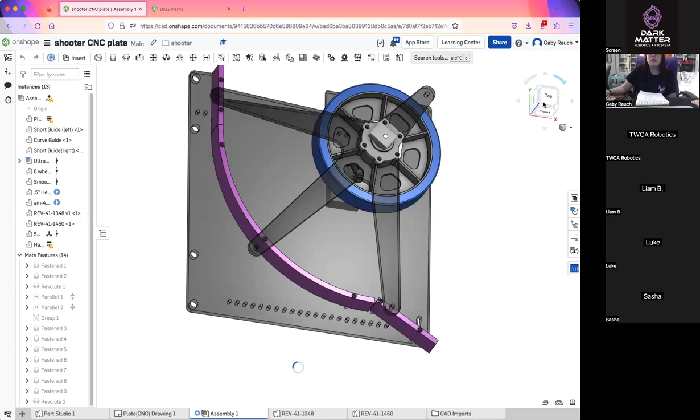Actually, first, last time I said I would show a good example of a sketch. So this is our shooter plate for our ultimate goal robot, and it loads. It looks pretty simple at first, but there were more calculations than you would think to go into there, and you can actually see that in the sketch.

So I was telling you about how you can use construction lines in your sketches, and that's basically what this is. So this is just our plate, and this line here is the shooter wheel, and this line here is that guide. We have exactly, I think, 4 inches in between here so we know how much the ring would be compressed. We used that exact same line as a guide to create our guide, so we knew what we were doing. That's just an example of how you'd use construction lines to help visualize what you're about to make.

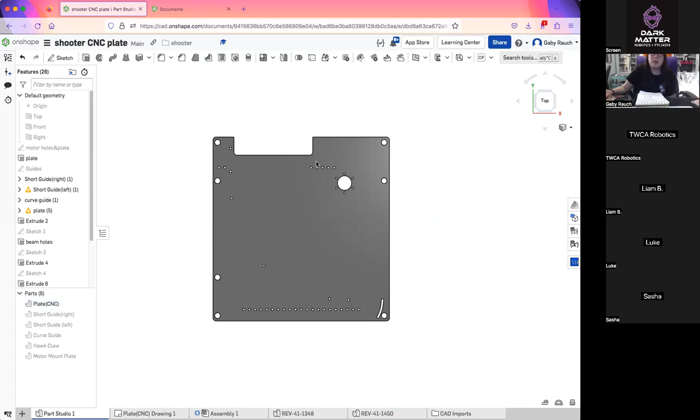I also said there were drawings last time, and this is kind of an example of what that would look like. I don't know too much about drawings, so we're not going to really cover them, but this is what that would be. You can use them a lot to help when you're actually machining parts. When we have someone else machine parts for us, we can create a drawing, and it helps them get an idea of what they're making. So I just wanted to go over that real quick.

So going over the feature scripts, let's go into day 2, and we could do this. If you want to go into day 2, there's a small enough group that hopefully we can all work in the same document this time.

So once again, let's create our own tabs, and that's going to be Part Studio, then create Part Studio, and then rename it.

And if anybody has any problems with that, let me know. But hopefully we should be fine. There's no plus sign again. If they're still having problems with this, I honestly have no idea why. Just create another document again, like we did last time, and see if that will work.

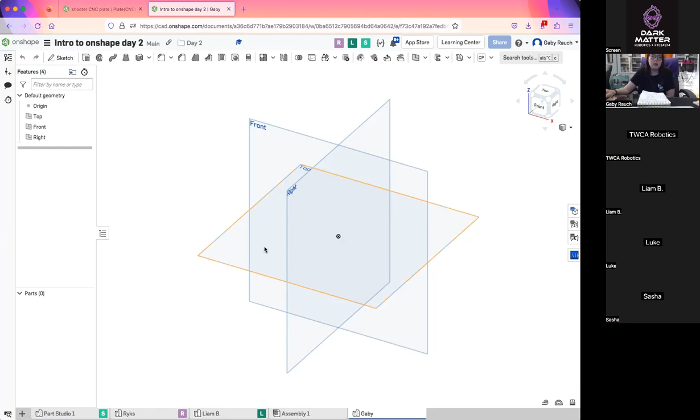And then I'm assuming everybody got the email about the feature scripts, so I am going to just go over how to use each of those really quickly.

So the first one was chain path generator, but that one I tried to use the other day, and it's kind of an older one, and it actually did not end up working for some reason. So I don't know why chain path generator doesn't work anymore. But there were some other ones we could do. So what were the ones that I had?

So spur gear, I know, was one. Spur gear is pretty easy. You would just click on spur gear and it will import one. And then all you have to do is go into here, so we could choose whatever number of teeth we want on the gear. So I can have that be 35. I can have it be... not 3... have it be 15. You can change that number to however you want.

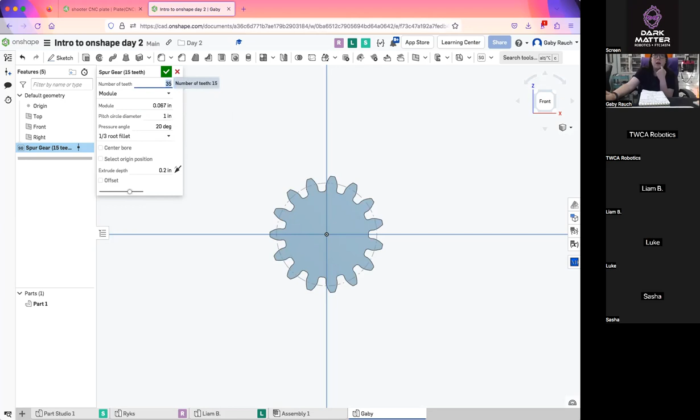And then this number is going to change based on how many teeth you have. I believe that is your pitch, so the number between your teeth. And then your circle diameter — the actual diameter is going to be this circle, which is called your pitch diameter, which is pretty much the center of your teeth where your gears are going to mesh.

So that's kind of like your desired size of your gear. So if you wanted your gear to be able to mesh with an already made gear, you would have to get the actual dimensions of that gear and use the same pitch diameter. And if you use the same pitch diameter, you'd have the same amount of teeth, and you'd have the gear that would work with whatever one you bought off the shelf. All of that information is going to be in the documentation of the part that you bought.

And then that is pretty thin. The root fillet is going to be the angle of this, I believe. Or that's the angle, this one.

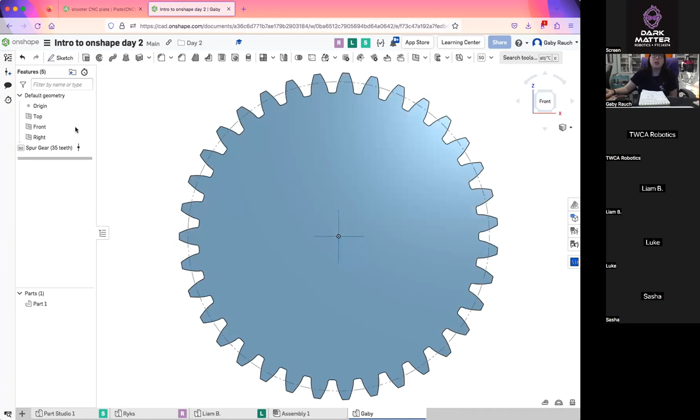But this one is pretty easy, especially for prototypes, making smaller gears. You just press this enter button up here to confirm your gear. And this one is a giant one.

I believe the other ones need a quick circle. You need a circle or a cylinder for the next couple, so I'm just going to make a cylinder really quick.

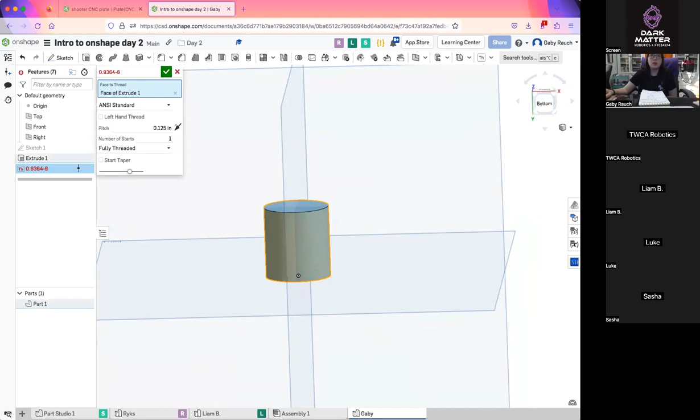The next one was thread creator. You need some sort of cylinder for this one, and then you're going to select the cylinder and it will automatically put some threads in for you. You can adjust the pitch of the threads.

Just like that, and that's pretty much all we use on that one. I believe you're usually going to be using standard. That's another thing you have to check with whatever screw or nut you're trying to match.

And then this one is kind of like if you wanted a shoulder bolt, you'd be able to adjust how far it is threaded down. So that probably wouldn't be used in a practical sense, but it would be used more for your CAD if you can't find the CAD of what screw size you want.

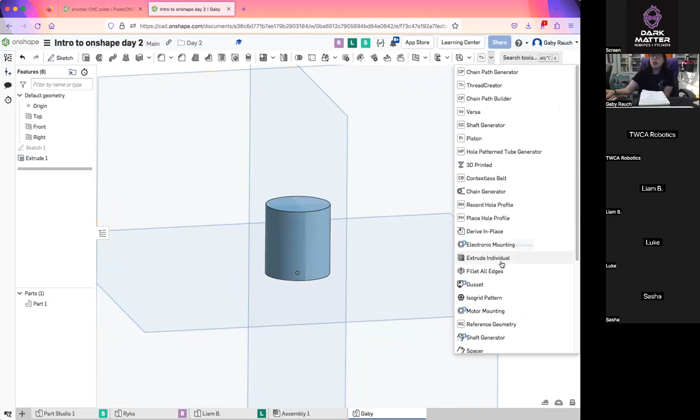And then spacer, you have to have a circle. Whether that's an extruded part or just a sketch of a circle, it will take that diameter and create a spacer for you.

So it will have a hole in the middle, and you can't adjust the hole, you adjust the thickness of this right here. So I could change that, and it will adjust the thickness. Oh, that is the hole. Yes, that is the hole. So you can adjust the thickness of the hole inside of there, and it will automatically give you a spacer.

And then this one is your length of the spacer. What were the other ones I had? No, I have it written down.

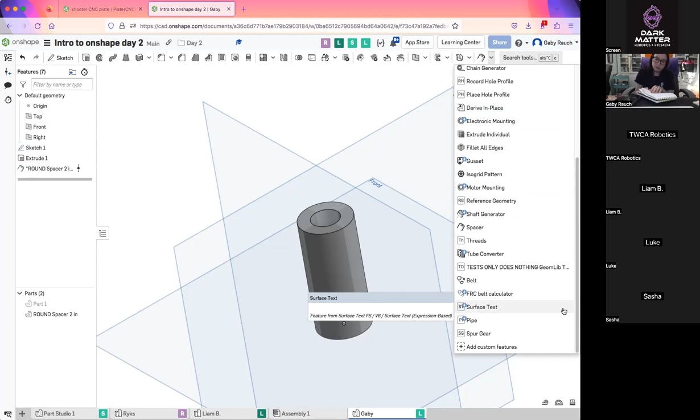Okay, so then the other one was chain path generator, but chain path generator is not working, like I said. What you can do is use chain path builder. And no, not chain path, I have too many of these. Chain generator, and you would put in

your center to center distance. Now your center to center distance is not going to be 12, you'd have to use what's called the chain calculator. The one we use is called the Recalc, it's R-E-C-A-L-C.

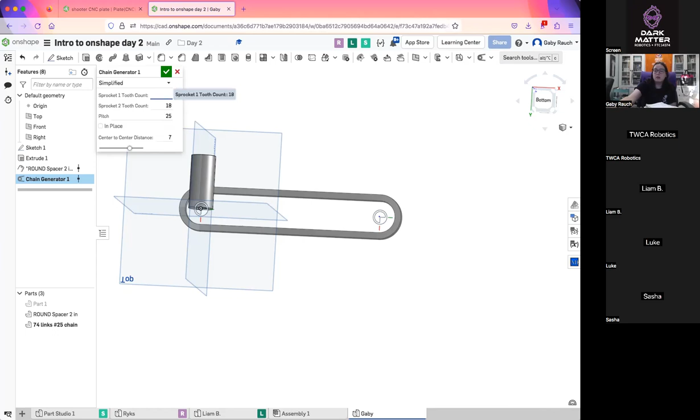You basically just put in the size of your sprocket and the size chain you want, and it will calculate it for you. So you just put in that center distance here, and then the size sprocket you're using, so the number of teeth on that sprocket, and it will automatically adjust the size for that.

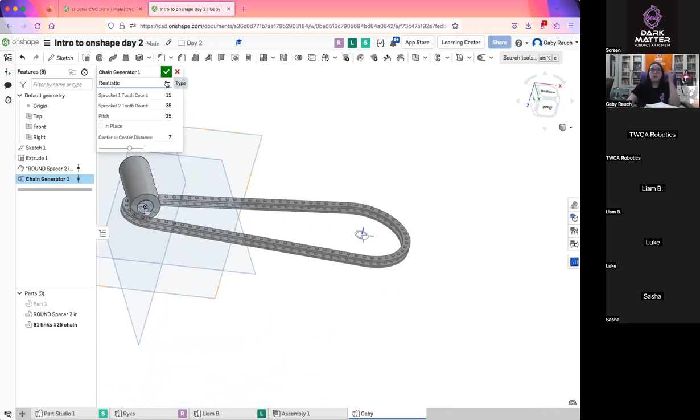This is pretty much just cosmetic for you to use in your assemblies, just to show that there would be chain whenever you are using chain.

And then this one, I don't know if most people are going to be using this one, but it is pretty much just a really easy way to do pocketing. So you might see some people that CNC their own parts and have cool patterns inside of it. You can use something like this for that.

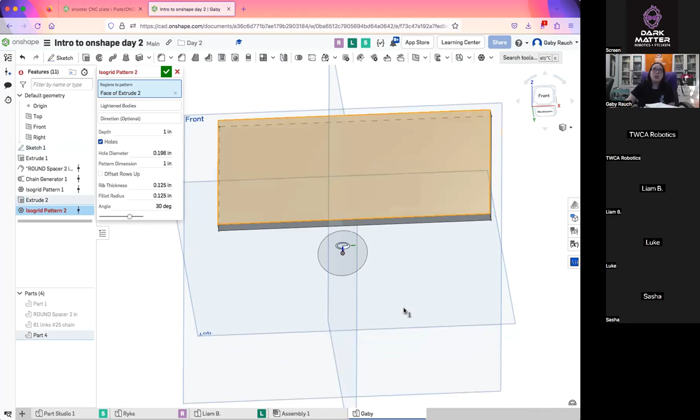And you can see that it just creates its own type of pattern. You could change the depth on it if you don't want it to go all the way through. And the holes, you could take them out completely or add them in, and you can make the pattern bigger or smaller depending on how big of a plate you have.

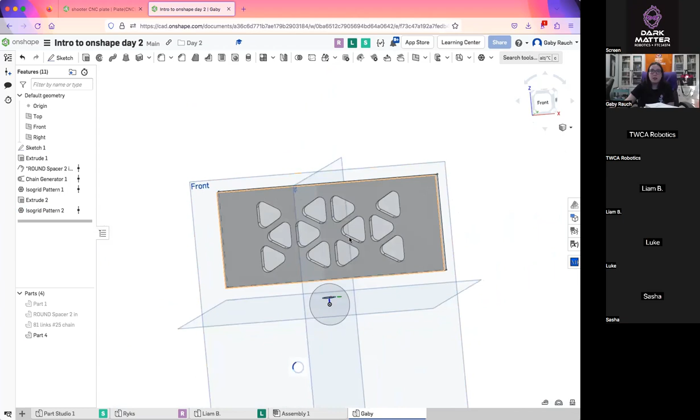So that's the main feature scripts that we use, it just makes life a whole lot easier. Instead of having to draw a bunch of triangles, it just generates it. Or instead of having to make a bunch of spacers, you could use the same circle to make other spacers. So it just makes life a whole lot simpler. That is pretty much all I had for feature scripts right there.

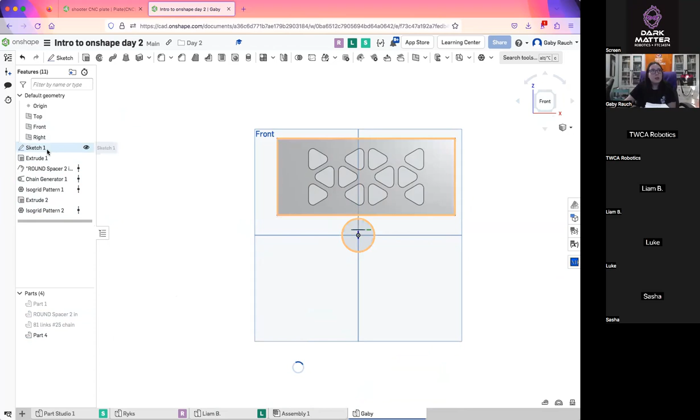And now we can move on to our assemblies. But before we do that, we do need some parts, since everybody is working in different documents. And my Onshape is going to not like me and load forever.

So we are going to make this real quick just so we can show better what we are about to do. If you want to follow along so we can all have the same parts once we get into the assembly, it is a pretty simple sketch.

We are just going to have a rectangle, a center rectangle from the center and go out, and each side is going to be 2.5 inches. Then just make all of the sides equal, so equal and then both sides, and you'll have a square.

Then we're going to take a line and make that a construction line, have that be a 1-inch line. Then put the midpoint - grab midpoint, select the line, and put the midpoint at the origin.

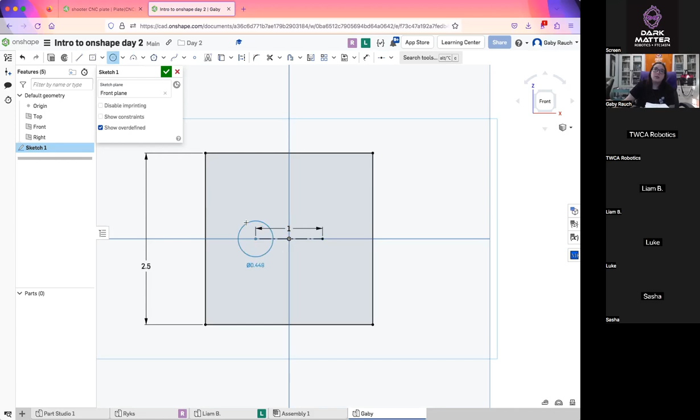Then we are going to take some circles and make them 1/2 inch. We can set those equal as well. Then the last thing is just drawing a line straight down the center. So everybody can have that done real quick.

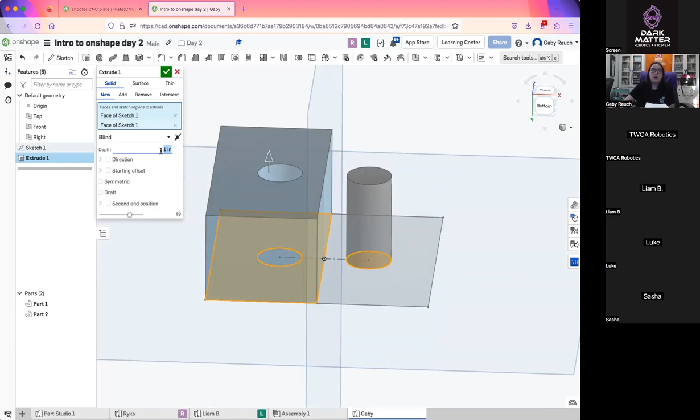Then we are going to extrude, so that is Shift E, with this button up here to extrude. This rectangle and this circle are going to be an inch and a half.

It's going to automatically hide your sketch, so we need to come and press the eyeball so it shows up again. Then have these two and extrude that 1 inch, and make sure those are both in new parts and not add, so they are their own thing.

Actually, you don't need this circle - I take it back, just this rectangle part. New part, 1 inch.

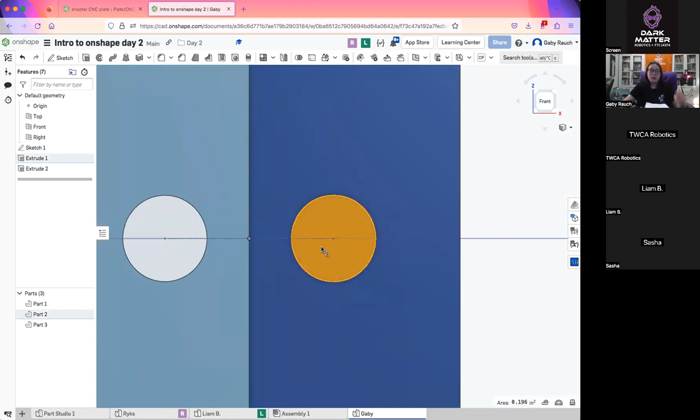Then really quickly so that we can see something later, we're going to create a sketch on top of this circle here. Click that circle and then press sketch. Then we're just going to draw a rectangle right there. You can dimension it if you want or not, it doesn't really matter. Then we're going to extrude that.

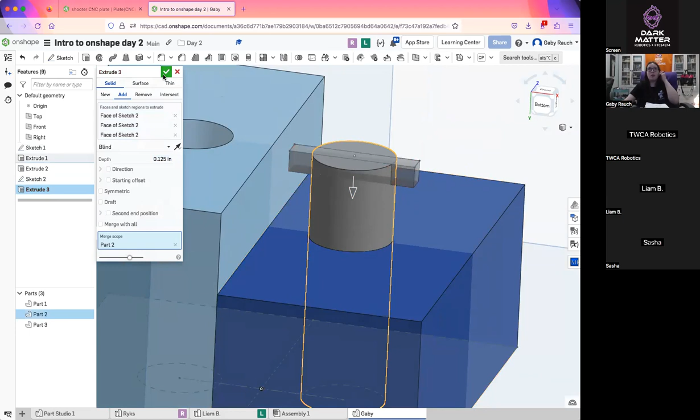Except we're going to extrude it down 1/8 of an inch, and that is going to add to this circle. If this part is red for you, or if it looks blue, you just have to hit that merge scope button and make it merge with that part. And that is it. Does everybody have that?

Is that sketch for you?

Remember, if you need to get this dimension tool, that is right up here. You can just click that, then click the line, and then type a 1. That will give you that distance.

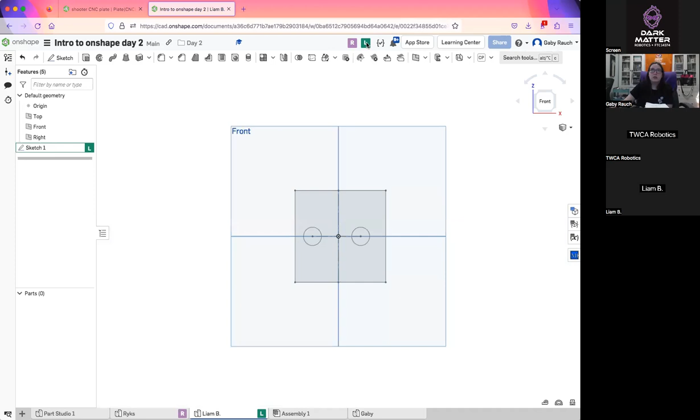Then to get that line in the center, we did - line L, dimension, 1 inch, and then we went to the constraints and got the midpoint constraint and clicked the line at the origin.

Right now, I'm not too worried about getting it perfect. We really just need the parts so we can put them together, pretty much.

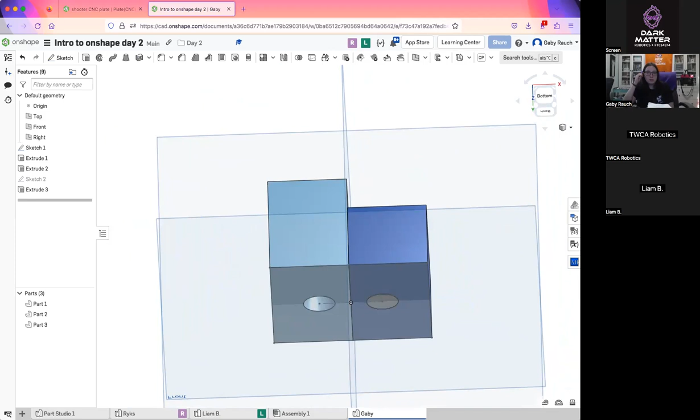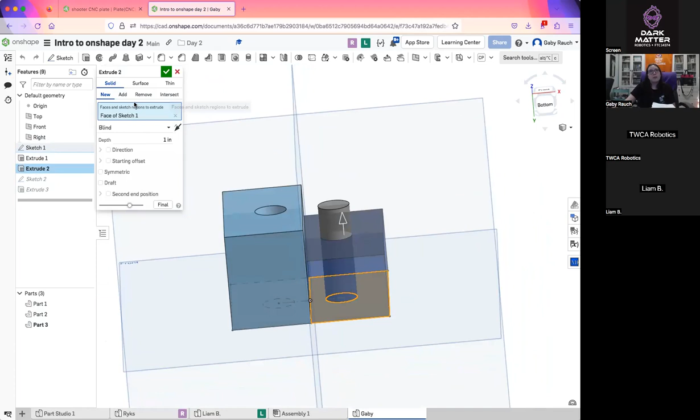And then that circle and this half was 1.5, and then this one is 1. So remember, you have to select them separately when you go to extrude. Then do another extrude and select this one, that way they're at different heights.

So Liam, I think your problem is your line right here needs to be a construction line. You should be able to go in your sketch and click on that solid line and click construction, and it should go away, and that should solve your problem.

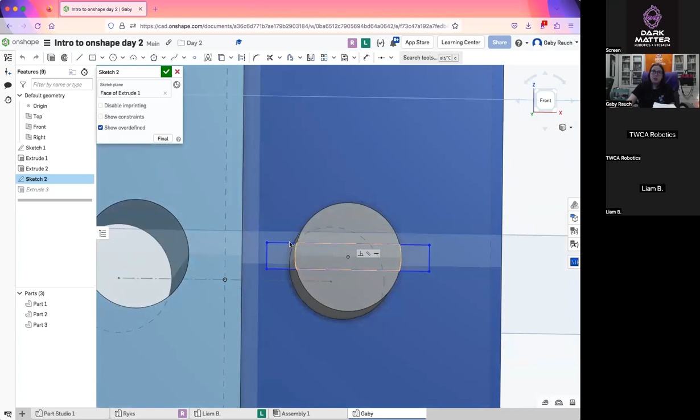Perfect. Now the last thing is the little doodad on top here, and that's undimensioned - it's just a rectangle on there. Then extrude it downwards. If you need to change it if it goes up automatically, you just need to press this little arrow to make it go down.

So all you have to do for that is do a sketch and then select that top part as your plane. Then you can sketch on top of that.

So you can select multiple things in one extrude. You can see I'm able to select this side and this side in the same one. Perfect.

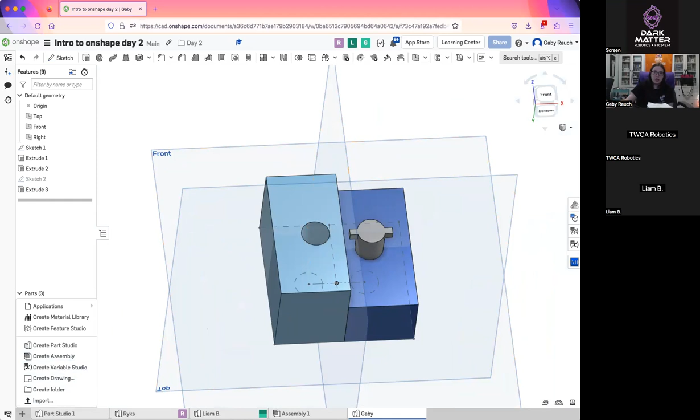All right, so now that we have that, we are going to talk about assemblies. An assembly is a different tab, so you have to insert another tab, but this time press create an assembly. Then you can go ahead and rename that assembly.

You'll always be able to tell that the little square doodad is the assembly and these little rectangles are the part studios. So in your assembly, what an assembly is basically is when you take your parts and put them together, or take other parts and put them together. You do that using things called mate connectors that we will get into in a minute.

But to put things together, we have to actually get the parts. To do that, from your assembly, you press insert up here, and then you have 3 options. Your current document, you're going to have access to every part studio and every assembly in here. Once you have an assembly, you'll be able to see that, but we have access to all the part studios. So if you click on one of the part studios, it will import all the parts at once. If you click this little drop down, you're able to import one at a time.

You have to actually click to put it down. If you press the X, everything is going to go away, so you have to actually click the check mark for it to stick.

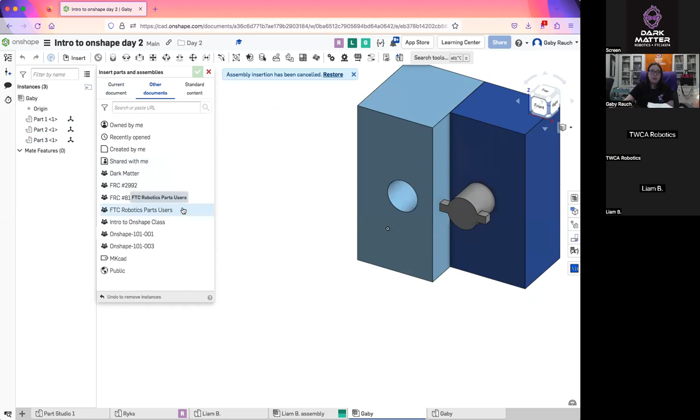Do you have the FTC part library? You should be able to go to other documents and see the FTC Robotics Parts Users. Do y'all have that? Once again, from here, that is other documents, and then you should have this. Put in the chat if you do have it or if you don't.

They may have not given access yet, which is really annoying that they don't do that. There's nothing in shared, well it should not be in shared with me, it should be a team. So there should be other documents, and it should be right down here, with the little people on the left. You should have the intro to Onshape class, and then there should be this one.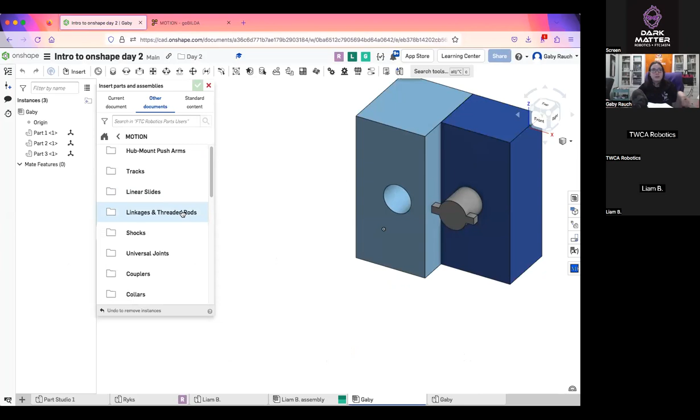So if you see, when we click on goBILDA, they have motion, structure, electronics, all of that, all the same. So if I click on motion, I have all of these exact same options. So if you ever get stuck looking for a part, you can actually find it on the website, and that will show you how to do it on here.

So if I wanted to find a sprocket, let's say I wanted this hub mount sprocket. Yeah, that's a bad one. Hubs are a good one. Let's say I wanted a hub. So this will actually tell you, you can actually see up here, it says motion, hubs, sort by style, and let's say I want this one, I'll press imperial.

And you see that it is the exact same way: goBILDA, motion, hubs, and then they have the sonic hubs and all the different ones on here.

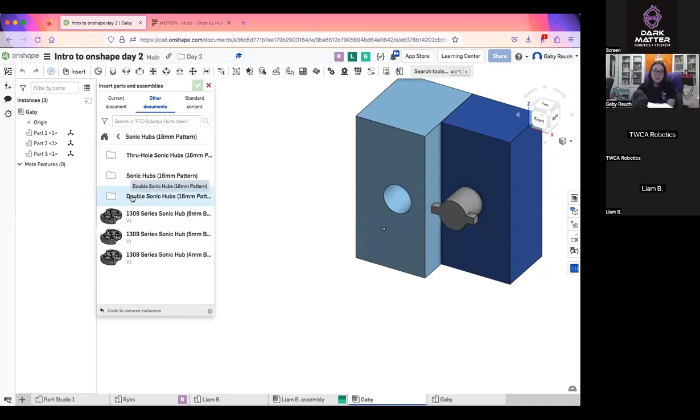It doesn't matter if it has the right dimensions or not. We basically just need the shapes to be able to show the shape. So you would go through here and then you'd be able to click on the parts. You want the assembly if it's an assembly. If not, you'll be able to just click on the parts and bring it in just like that.

You can also do that with any other documents that you have. So let's say you're making a robot document and you're trying to make a full robot assembly, and you build your drivetrain in one document and your lift in a different document and a claw in a different document. You'd be able to actually go into those documents the same way and grab those assemblies and parts just like that.

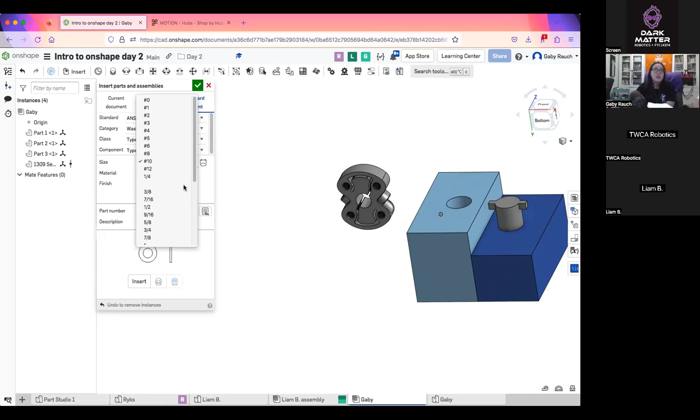And you can also search public on here as well, and then they also have some standard content over here. So that is things like screws and washers and nuts and just random things like that. So they have washers, they have different types of washers, and then they have different size washers. All you're going to do is press insert once you get all the right stuff that you want. You can change it to screws and get some standard normal screws, and you could change whatever head you want and whatever size you want, and it will give you a screw of that size.

It's not threaded just because it makes it easier for Onshape to render. But that is some standard content that you can get, that Onshape just has for you to make yourself pretty easily there. And then you can also get stuff off of, so let's say that you don't have the parts library yet, but you still can get the parts from the actual website.

So for example, goBILDA and Actobotics, and pretty much all the vendors we use are the same. If you click on their part and scroll down, you will see a STEP file. If you click on it, you will download it, and you can go over here and import it, and it will be able to import the part. It will show up in its own tab and do its own thing, and you will be able to insert that into your current document. So that is how you can get the same parts without being on the parts library.

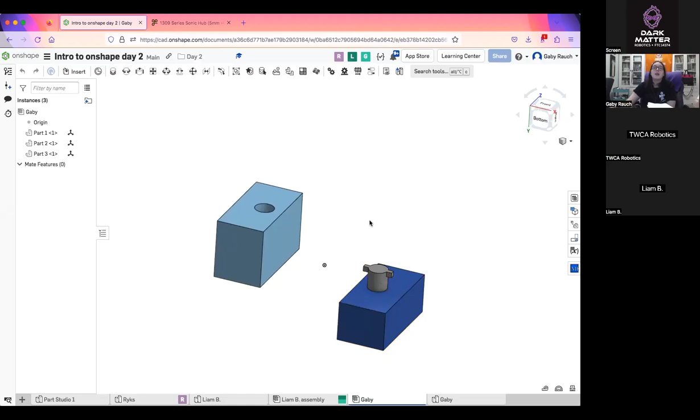But for now, we're just going to use these parts that we made because they were made for this. So you can see right now everything comes apart because nothing is mated together. So what we use in assemblies to put things together is called mates and mate connectors.

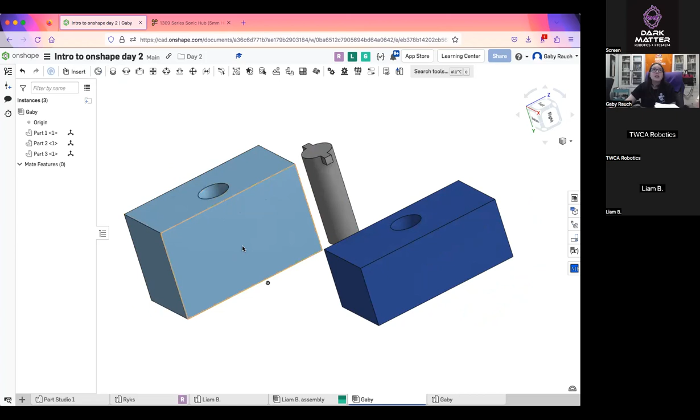Basically your mates and mate connectors are the virtual screws or glue that hold your parts together. So a mate connector is what is actually on here, that is like the point that you are going to put to another point. That's called a mate connector. This little circle on these white dots, that is what's called a mate connector. A mate is the actual one that you're going to put. So you use a mate, you grab a mate connector and click another mate connector, and it will glue them together. So there are different types of mates, but there's only one mate connector.

So the first one is a fastened mate, and that is pretty much just like glue. You can click this one up here, this is fastened, and you will select one of these. You select a mate connector from one part, and select a different mate connector from another part, and it will just put those two together.

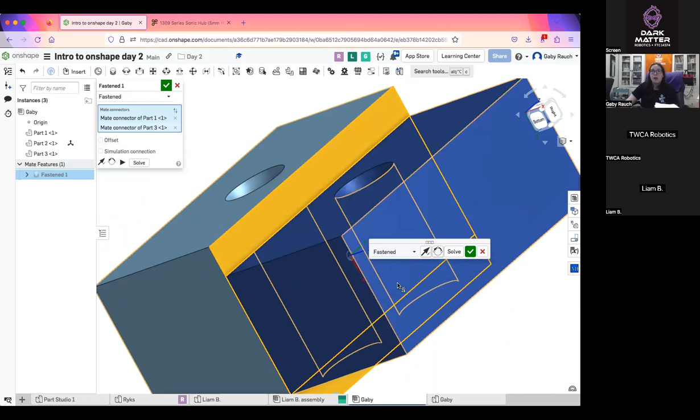And if you press, there's this little menu that pops up. If you press this button right here, it will rotate the part. If you press this one, it's going to flip the axis of it, which looks really weird. And then if you press this check mark, it will just bring you to having another mate connector. It will keep the same mate connector menu open, and you can rock and roll all through like this. But if you click the mate connector check mark up here, it's going to take you out of that menu.

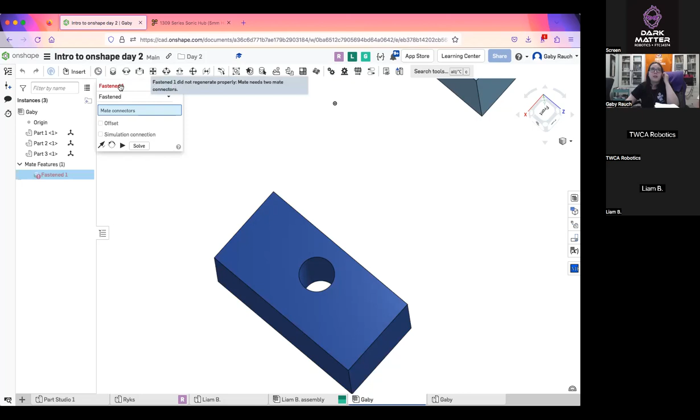So sometimes it can be hard to select your mate connector. Let's say I'm doing a fastened mate and I want that center one down there, it's kind of hard to select. So if you actually select in here where all three of these little white circles pop up, you can hold the shift button down, and no matter where you move your mouse, those three are going to pop up, which is very helpful too.

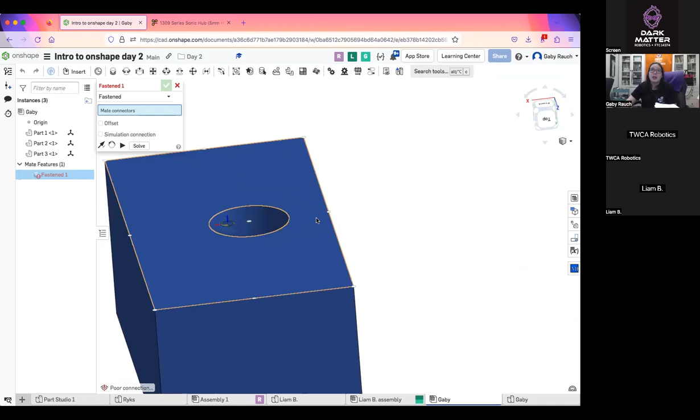So most of the time when we're mating things together, we're going to mate the faces, so like this face to one of these faces. It doesn't really work when you do a corner or a line or something like that, more often than not. It's easier just to mate a face to a face. And you can do all these other ones instead of just the center one. You can select the side one and go to the side one, and it will do the same thing, but now it's not centered. So that is your fastened mate.

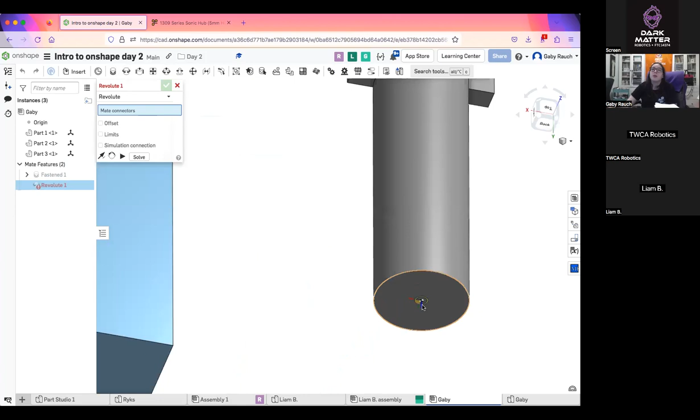The next one is a revolute mate, which you can probably tell what it does already. The revolute mate is for, you're mostly going to use it on circles and cylinders. So if we take the bottom of this cylinder or the middle, the bottom is usually easiest because then you could just select this ring down here and it will select like that. Oh wait, no, that's the wrong one, this one. And if you ever select the wrong thing, instead of deleting the part over here, you can actually delete it using these arrows, so you can see which one you selected and do it that way. So with this one, it allows you to actually rotate.

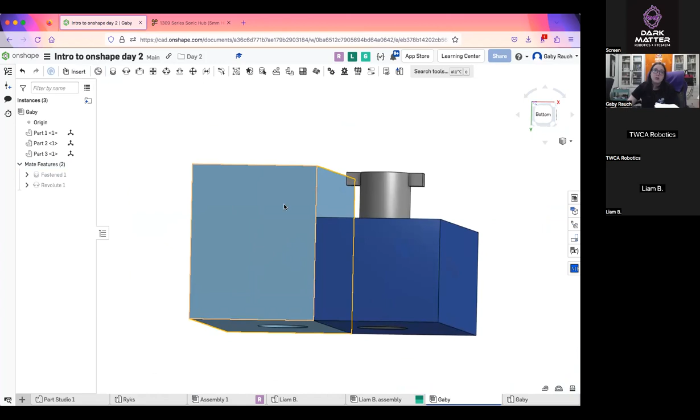One thing to mention about making assemblies: you always want one part to be fixed in place so it can't move. Right now everything can move, even though they're stuck together, the whole thing can move. If you right click on one of the parts, you get all of these options, and the most important one is fix. You want one part in every assembly you make to be fixed, that way the whole thing doesn't move. Then you try to move other things.

Now that is fixed, I'm actually able to rotate this part right here, since I have a revolute mate on it. So let's say you were making something like a turret, an intake, or something that you need to spin in CAD to see what it's going to do, you would use that revolute mate.

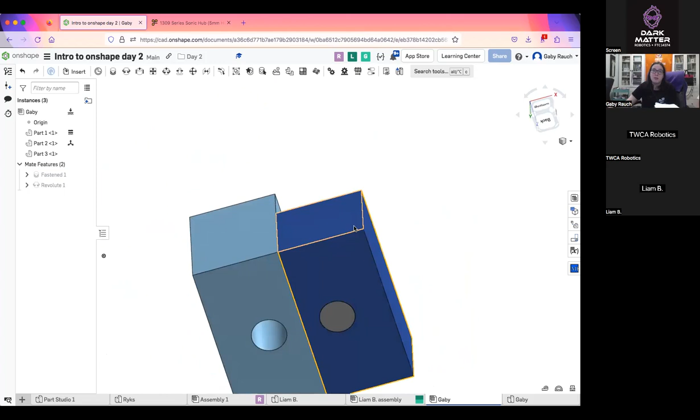One thing to note about revolute mates is they are notorious for making Onshape run very slow. The more revolute mates you have, the slower it is going to run. So you want as little revolute mates as possible when you are CADing, especially in Onshape, because it just makes it so annoying when you have a million of them. So that is the revolute mate.

To delete parts or fastens, you just click on it and press delete, or you right click and press delete. Sometimes it only likes to right click one. So you see I fixed it so this one can't move.

So the next one is a slider mate. Just like you would think, that one slides and doesn't allow you to do anything else. I believe this one only lets you slide vertically up and down. This is what you would use in the case of a linear slide or something like that.

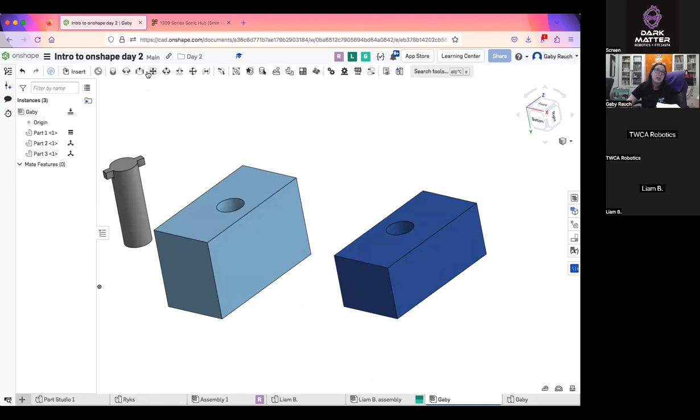Usually when you're doing linear slides, I'm going to make it like this because that's how you would do it. You would go to the bottom of the part and select the edge of both of those, and that's how you would do a linear slide. Now you can see that it could go straight up and down, like that. So once again, that's how you would do something like a linear slide, with a slider mate.

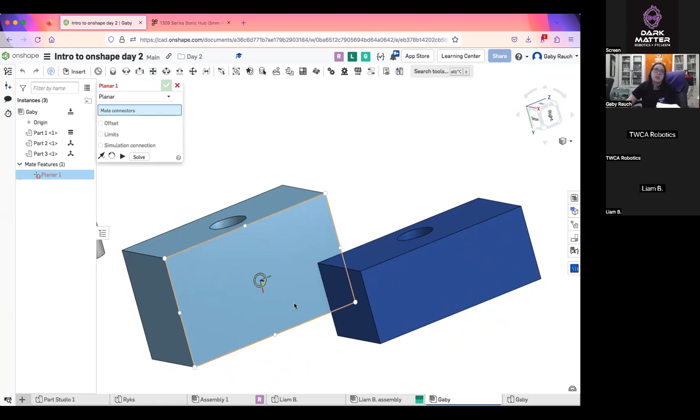Delete that one, and the next one is a planar mate. You're going to select a mate connector that is on the plane you want it to be on, and then select the face you want to be on that plane. Then you'll be able to move this all around, but that face will stay on that plane, or it should, but it's not working very well. Sometimes I just don't understand this one.

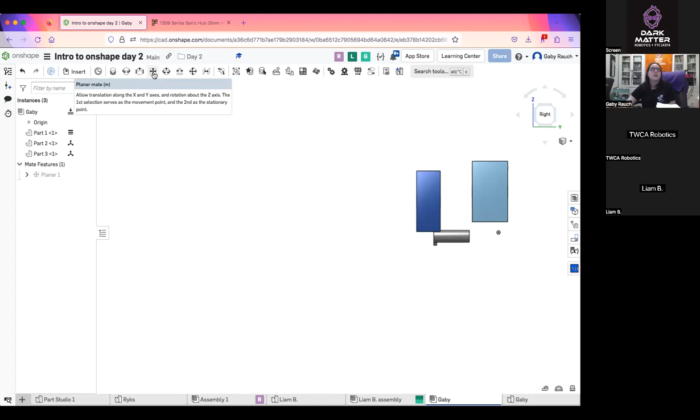Maybe it's because this one is fixed. Now that that one's fixed, you can see it moves just in a pretty weird way. You can see it is staying on that plane right there.

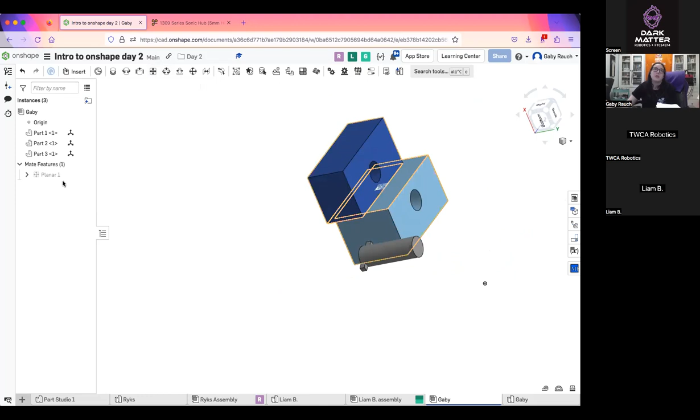So when we did that one, you see the first point that we select - I'm going to select this one now - that's going to be the side that can move around freely, and the second point is going to be the stationary one. So now if I were to fix this one, clicking the dark blue one first, it's still going to be weird. And it's broken. Oh no, it's still on the plane. It's still on the plane. It was broken.

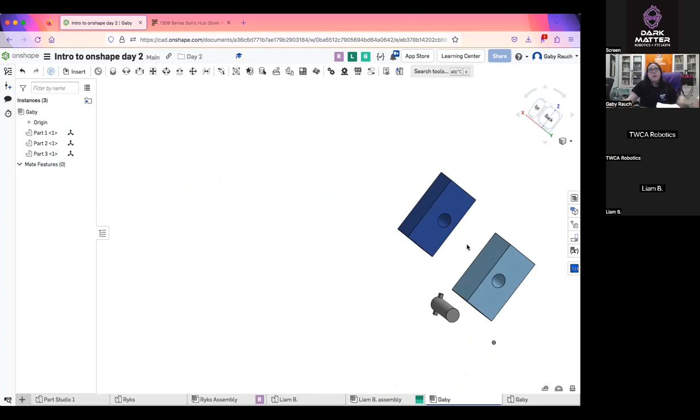So then cylindrical mate is an interesting one. I'm going to fix this one again so it doesn't move. A cylindrical mate is basically a slider mate and a revolute mate in one. So I can select that now, and it will actually be able to slide in and out and rotate as well. Sometimes that would be used for something like a pin.

Then the last one I have here is a parallel mate. This would be something you would use if you are making linear slides and you have two of them and you want them to be the same, going up and down together. You would use a parallel mate, so you would do this one, the top and the top of that.

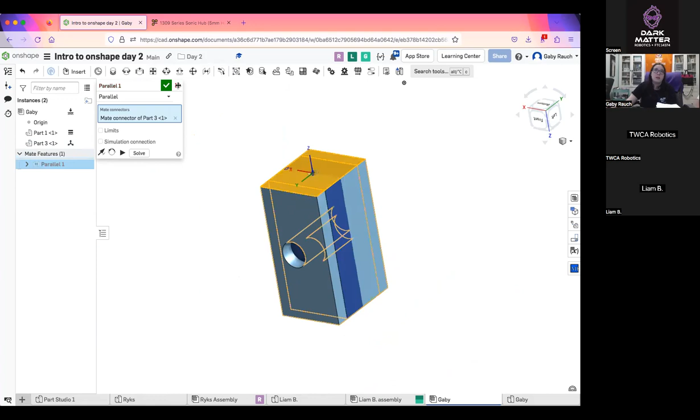Basically I can move them - well, not that one, it's going to be broken. But these are going to move together, or they should. But they're not, why? The parallel one is just like planar, it gives me trouble sometimes. So they're basically just going to stay parallel with each other, if you have something like a pivot.

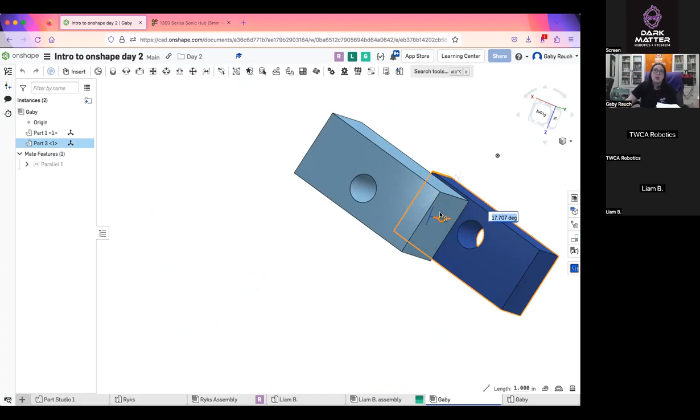You can see that they're going to move together and stay parallel when I move them. The planar mate is the one that's going to keep it like a linear slide. That's what the planar mate is. This one is for like a pivot, if you were doing a pivot.

Okay, so that is all the mate connectors that we use. Mostly there's the pin slot one, the ball mate, and tangent, but we've really never used those very much. The ones that I showed you are most commonly used.

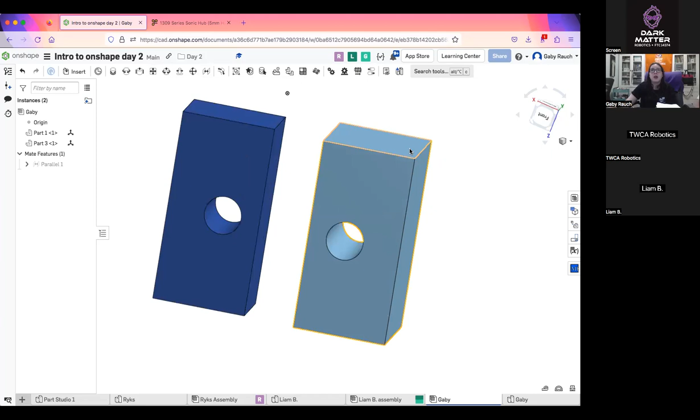There are a few other tools in here though that I will go over. Where did the gray one go, oh, I deleted it. Need the little pen. So I am just going to make this, actually no, not.

Sometimes when you import something, let's say I imported a servo from goBILDA, the servo will come in a bunch of pieces. Actually, let me do that. Let me stop screen sharing, and I'm going to download a servo. You don't have to do this, I'm just doing it for example.

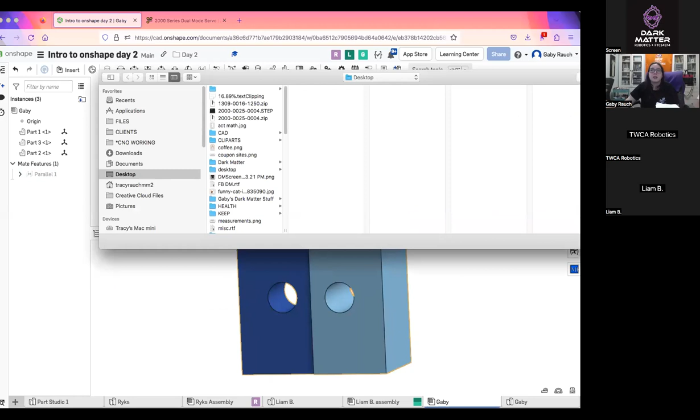So to import something like that, I went over here and downloaded it, and you just press import and select the file you want. And then it's going to ask you if you want it to go into the document as an assembly and a part studio, or just a part studio. I'm just going to do a part studio for this demonstration. And then it's going to ask you all these questions.

Typically, you're not going to need to change anything. Sometimes other software will have the y-axis pointing up, whereas in Onshape we have the z-axis pointing up, so it'll ask you if you want to orient it differently. But for other goBILDA models, typically it's z-axis up, so we don't have to mess with that.

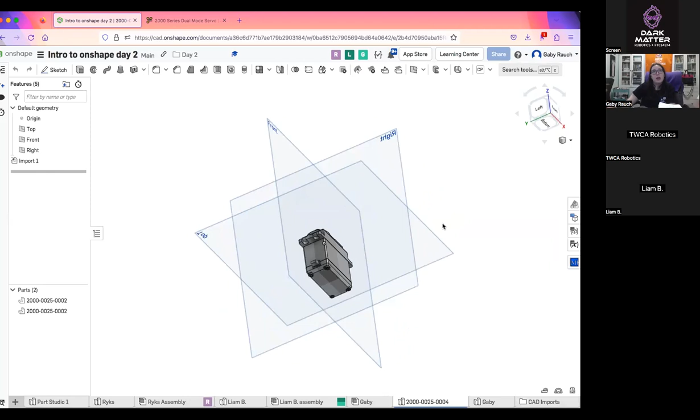And then it is going to upload, and you're going to have a CAD imports file show up. It's going to have this weird picture, and then this will show up. And it is multiple parts right now, see, it is 2 parts.

Usually it is a million parts, like every screw and every tiny gear that is in the servo, and it makes it a whole lot more difficult. So for this one, it's only 2 parts, so it's not that difficult. But imagine it is a bunch of parts, and you move that, and then everything is in there.

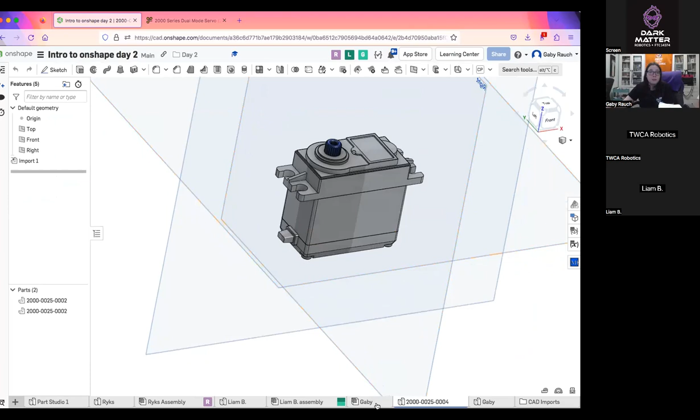Which is pretty annoying, so I'm just going to delete those real quick. If you have something like that where it's a bunch of parts and you don't feel like it, and it imports in a part studio like this where it looks put together, and you don't feel like taking it apart and mating it all together, the simple fix would be to just import it as the part studio, so it imports just like it is there.

You can select both of the parts and go up to this little group feature right here, and it will group all the parts together so that they can't move. Instead of having to mate a million parts together, even though this one only imported as 2 parts, it would be pretty easy to just mate that one part on. But this is an example.

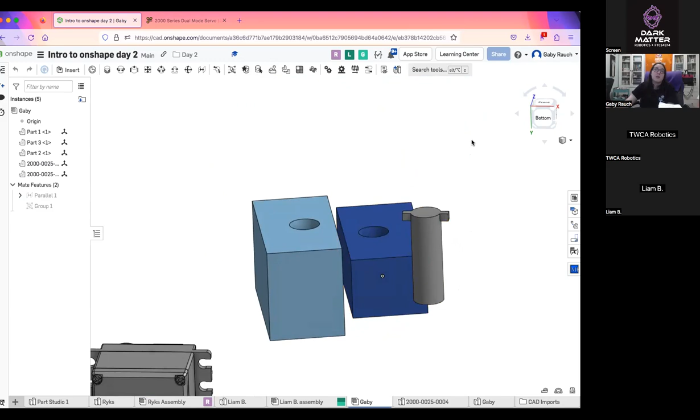Another one that we use really often, most often with things like screws. Let's say you have a plate with a bunch of holes that you need screws in. Instead of importing 20 different screws and mating 20 different screws individually, you can actually do it with one screw and one mate. So to do that, we would just do a mate.

The shortcut for a mate is M on your keyboard, or you can just press this over here, and you can actually change it on there. But I'm just going to do a fasten mate for this, and you select what you want and where you want it to be. You see I mated it in there.

And then now instead of duplicating this and creating another mate, you can actually use this replicate tool. It's going to ask you to select an instance, which is your part, and then automatically, 90% of the time, it will know which mate it is that you are copying.

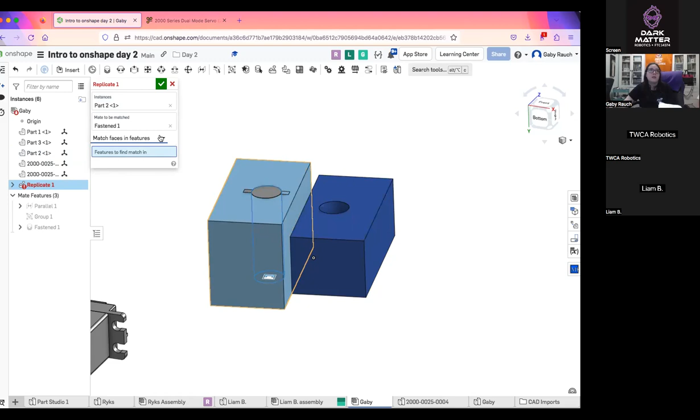So you have all these options to match faces and parts, features, or individual edges or faces. Typically, individual faces is going to be easiest. Yeah, this one, match faces and features. So you can actually select like an edge, and you would be able to go in and select the hole that you want. Nope, not that, individual faces.

Why are you doing it? Oh, it's selected multiple parts, that's why. Make sure there's only one part selected in there. Okay, so my problem is I'm not selecting this, so make sure that this is blue when you are touching it. Whatever is blue is what you are on, and what's red needs to be filled in.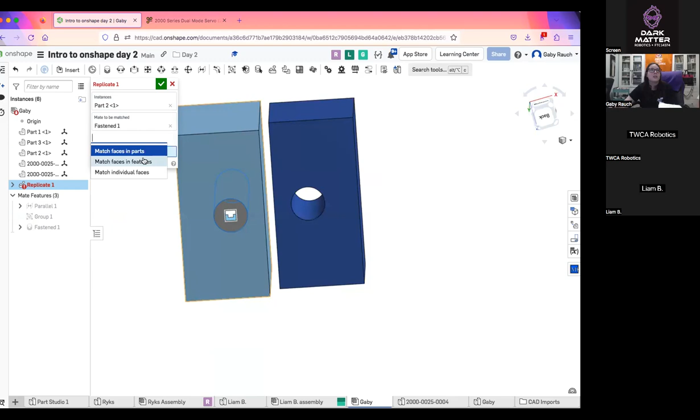Why is this not working? Replicate that part, this one. That fits. Okay, it does not want to work with this one, with this part, for some reason. Put something else in here. It's probably not the same size or something like that. But let's just say I have a bracket in here.

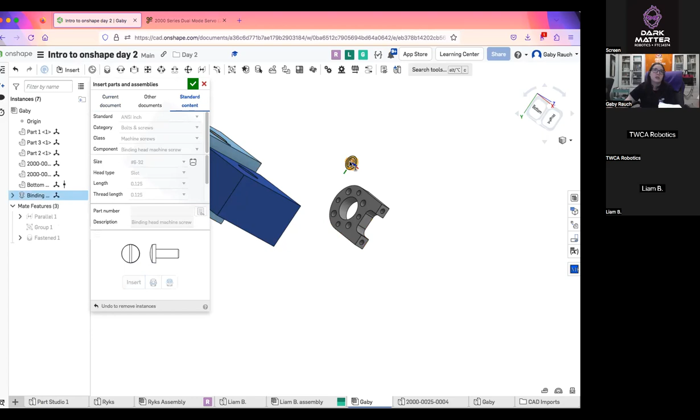And then I'm going to get a screw, and it's going to be a 6-32 screw. Did not insert it. Insert that one, and then you can see that one comes with the mate connector on it. So sometimes it comes in like that, and to fix that, you would just press this flip axis button, and it'll fix that for you.

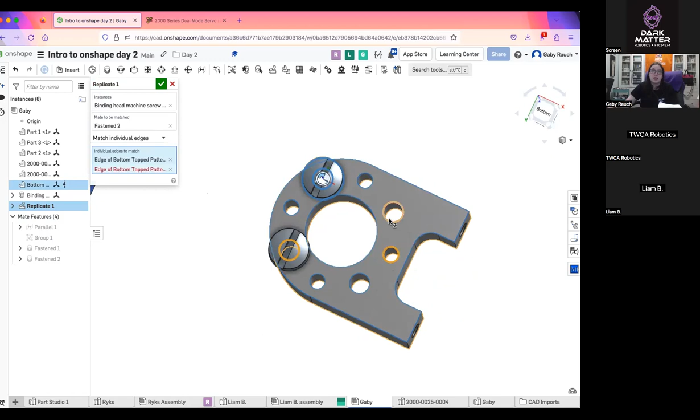Now, to replicate instances, select the screw, and then faces to match, and it will automatically take whatever hole is the same size as the one you had and put a screw in it. You could do individual edges if you wanted certain screws, and click those individual places. Now you see that one's not the same size, so it's not going to work, and you can click the individual edges for those.

So that is how you could do the replicate tool if you had something like a plate that you wanted to put a bunch of screws in. And that would work.

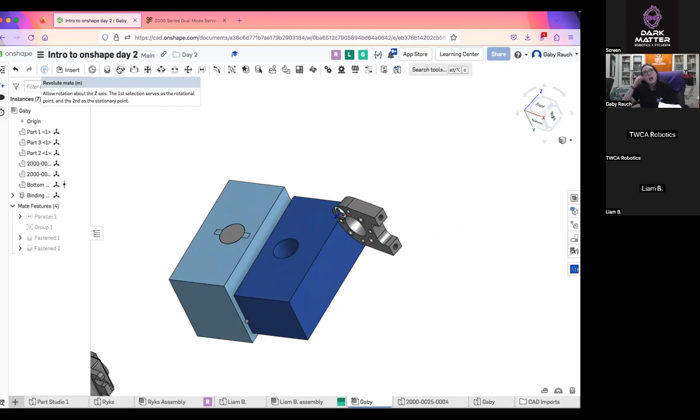And then the last one, they have this gear relations tool, which can be pretty hard to work with sometimes. So I'm not really going to go over it, but you'd be able to make things move. Typically you would just use a revolute mate for that, because it's a lot easier to do it that way, most of the time.

So just a few more things to go over with assemblies before we go. If you right click on a part, you get all of these options.

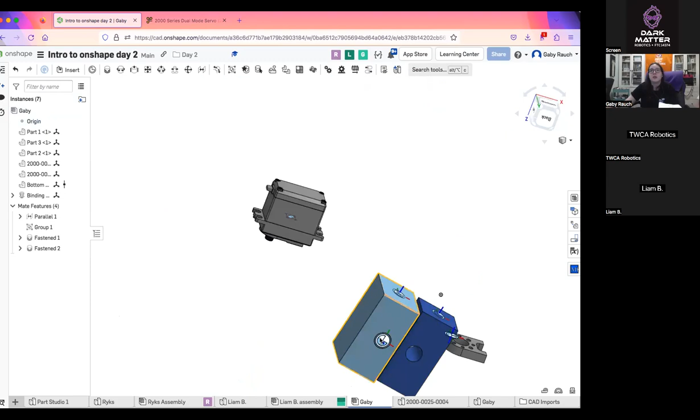So the first one is going to be hide, and you can hide all of your instances. If you do that, and right click, you can press show all instances. If you hide all of your instances and then press show all, it is going to show all of your mate connectors as well and your mates. So it's going to show the connectors, and it's also going to show whether that is a fastened or a group or whatever it is.

And when you have a really big model, like a full robot document, you have a bunch of those, and it will be annoying to get rid of them all. To get rid of those mates, you have to actually right click on the mate, and then you'll be able to hide other mates or hide all mates. Same thing with mate connectors - hide all mate connectors. To hide parts, it's going to be instances - you can hide all other instances, or hide all instances.

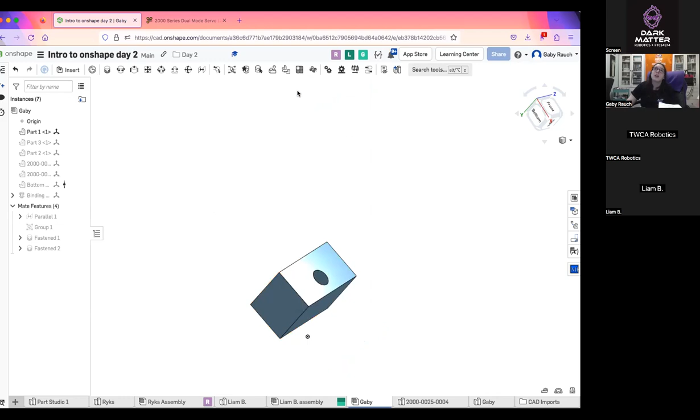You can also go over here and click the eyeballs, and that will hide parts, show parts, and same thing with mates. You'll see the mates have these little drop downs - that's going to be the mate connectors that they are connected to. That's how you'll be able to see some of those as well.

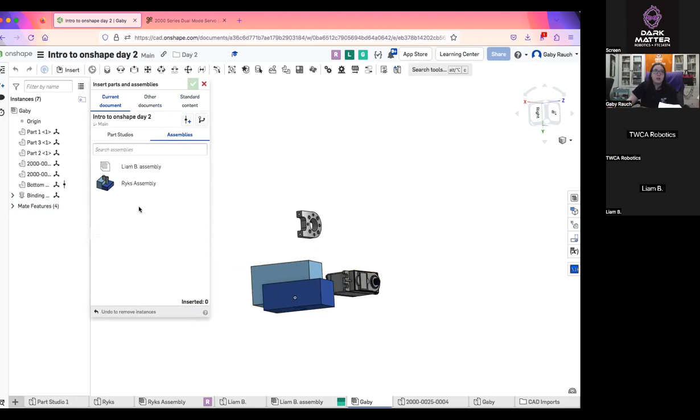So now that we have some type of assembly, if I go into someone else's assembly, or I could just import someone else's assembly - if you insert, you can actually go and insert other people's assemblies, or other assemblies that you have as well, and they will function just like the assembly they were in.

So again, when you're assembling something, it does not necessarily mean that you are making it one part. So I'm gluing these together, but they're not one part - they're still separate parts. It's just like screwing pieces together, I guess would be the best way to say it.

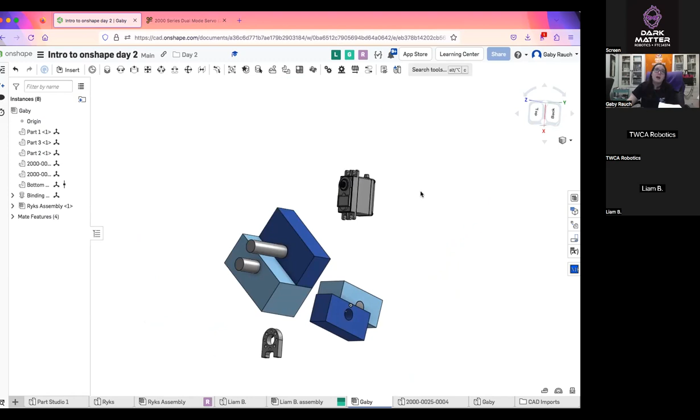So that is pretty much all I have for class today. This class was definitely not as long as last time, but there is much less to cover this time with assemblies.